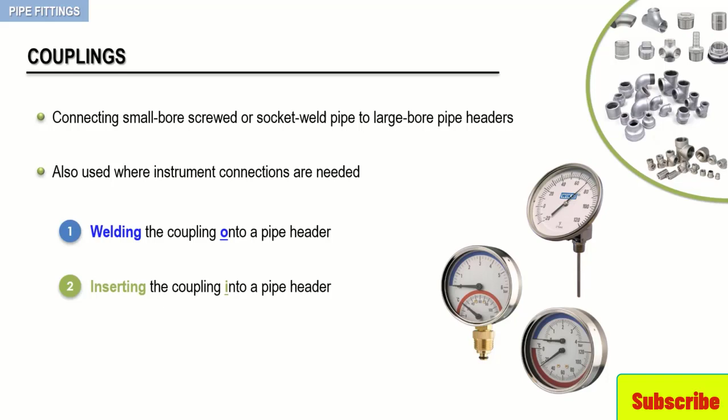Keep in mind, because of it being a branch connection, the nominal pipe size and the exact position of a coupling must be provided on a drawing, typically the isometric fabrication drawing.

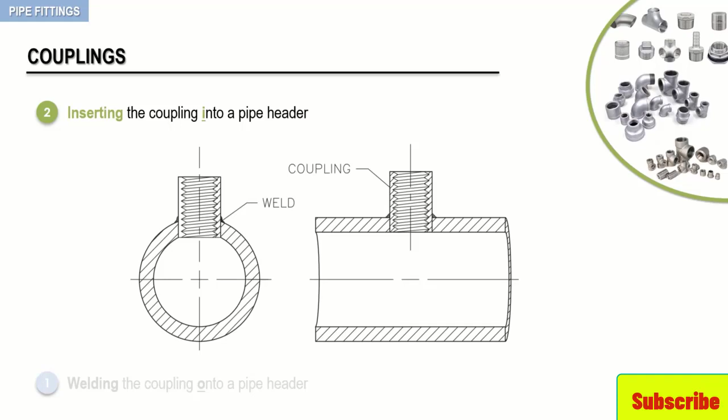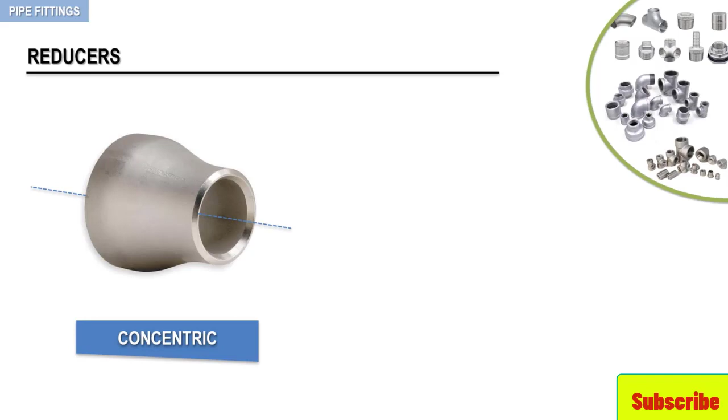In this video, we're going to talk about pipe reducers. Let's have a closer look. Actually, when you want to reduce the diameter of a straight run of pipe, a reducing fitting must be used. The reducer is available in two styles: concentric, as seen here, so having a common center line, or eccentric, having offset center lines.

The differing characteristics of these two reducers are quite noticeable. The concentric reducer maintains the same center line through both the large and small ends of the fitting. Conversely, the eccentric reducer has offset center lines that will create a flat surface on either the top or the bottom of the fitting, depending on how the fitting is rolled prior to welding.

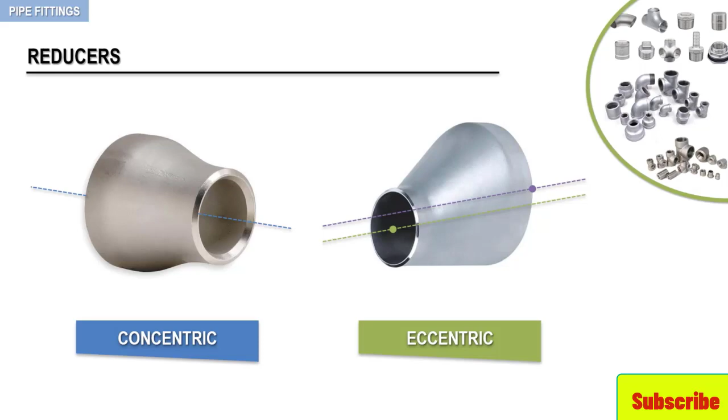Now, what I want you to keep in mind here is that there are specific situations where the eccentric reducer must be installed with its flat side on the top or the flat side on the bottom of the fitting. To better illustrate this concept, take a look at the following example.

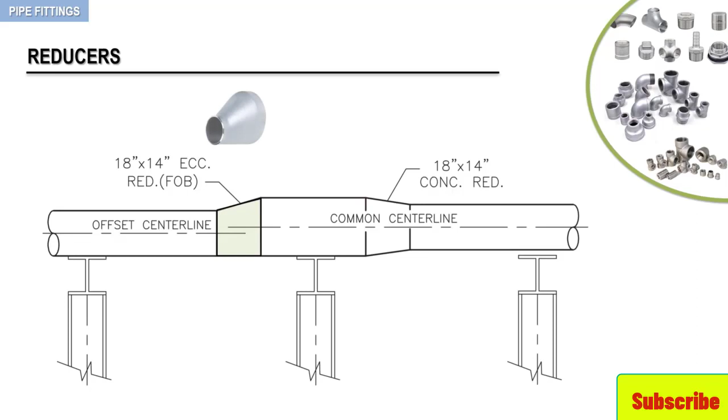The pipe that you can see here includes one eccentric reducer, highlighted here in green, and one concentric reducer, highlighted in blue. The pipe is routed through a pipe rack. It naturally rests on the steel beams and is supported throughout its length.

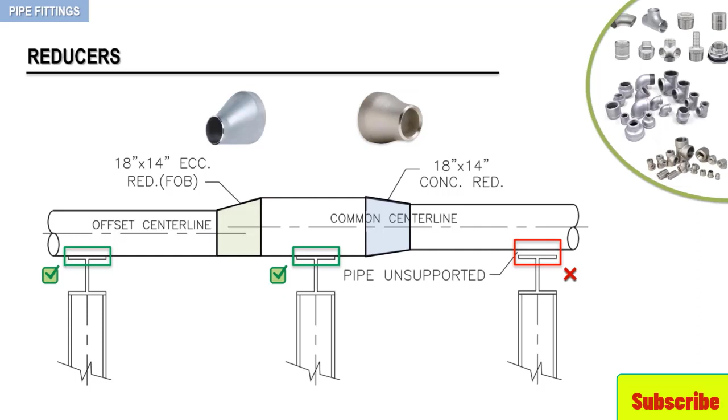But at a certain point following the concentric reducer, the pipe changes its pipe size while in the pipe rack. It does not rest on all steel supports anymore. The small end doesn't have a diameter large enough to touch the steel supports. Therefore, an eccentric reducer must be used in this pipe rack, as highlighted here, to maintain a constant bottom of pipe and to ensure the pipe will rest on all the steel supports for safety and mechanical integrity of the piping system.

Okay, now when representing the reducer on a drawing, it is necessary to include a note that identifies the reducer's size and type, as seen here, as well as its orientation. In this example, the reducer is to be installed with its flat side on the bottom. Therefore, the abbreviation FOB in the note instructs the fabricator how to install the reducer. FOB for flat on bottom, as opposed to FOT for flat on top.

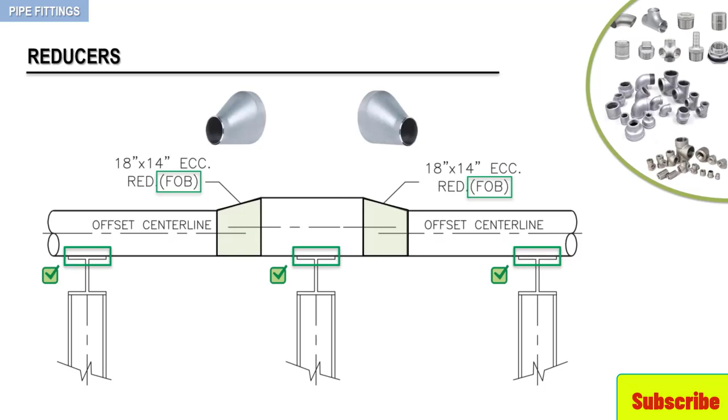Eccentric reducers are also used on pump suction nozzles, as in this example, to keep entrained air from entering the pump. By keeping a flat on-top surface, vapor pockets can be eliminated. The figure that you can see here depicts the installation of an eccentric reducer installed on a pump suction nozzle with the flat surface installed on the top. Therefore, FOT.

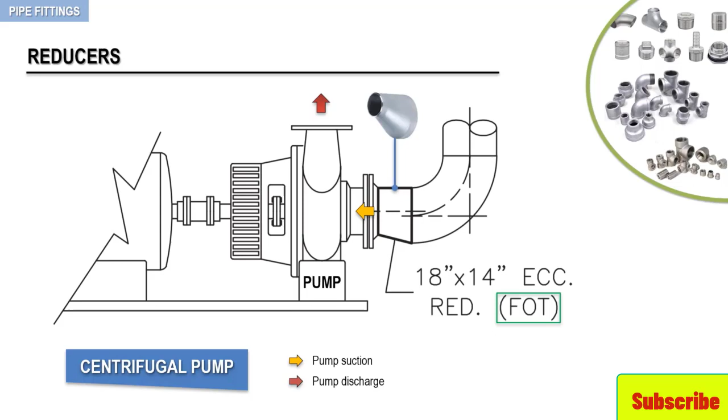Now, an important aspect that needs your attention. It is important not to forget to include the dimensional difference between the two center lines of an eccentric reducer when calculating the elevations of a pipe in a pipe rack. The formula for calculating this difference is highlighted here. A quicker but less accurate method is to take 1/2 the difference between the two outside diameters.

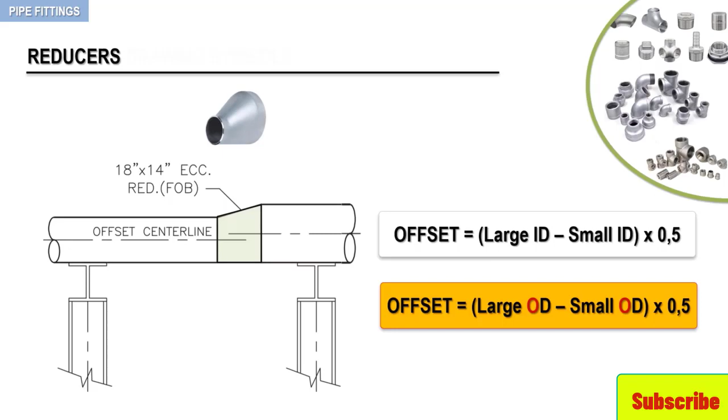Notice the callouts that must be included with the eccentric reducer. The large end is always listed first, no matter what the direction of flow is, and the flat side must be indicated. Recall whether FOB for flat on bottom or FOT for flat on top.